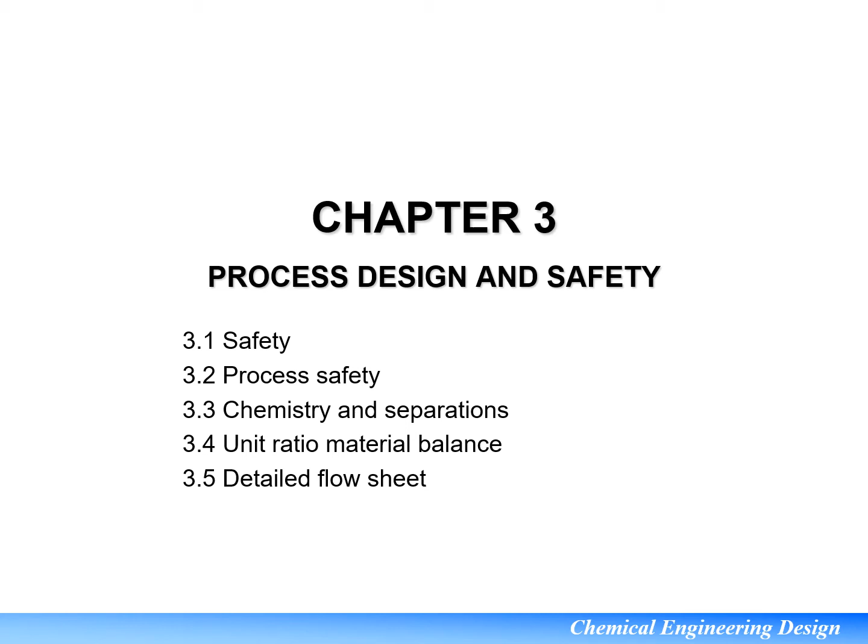All these subchapters you have already learned, in subjects during semester 1 if I'm not mistaken, and also in subjects during semester 3 for material balance and separation in semester 4. So I will just briefly explain this topic and relate it to what we're going to learn and what you're going to do for your assignment.

Safety is a safe design and operation of facilities, of importance to every company. It's involved in the manufacture, not limited to fuel, chemicals, and pharmaceuticals. All companies, all industries need this safety, because when we prioritize safety, we ensure that our workers are safe to work inside our company, and also the surrounding residents and consumers, we can ensure that their life is not affected or harmed by our company's operation.

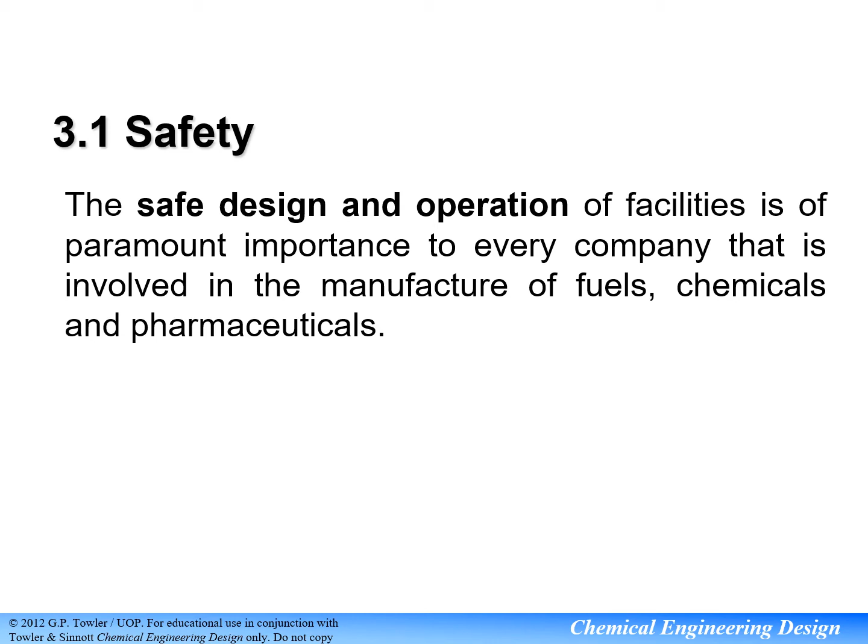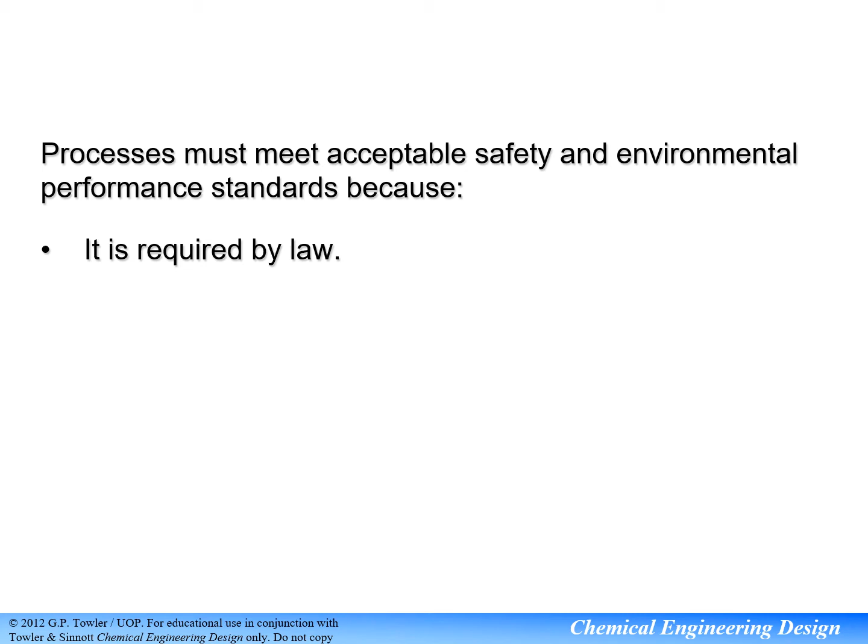The process must be acceptable for safety and environmental reasons, because safety is required by law. As we all know, we have DOSH, NIOSH, DOE. So all these agencies are the bodies for safety.

The other reason is the cost - human, social, economic - of non-compliance can be catastrophic. Sometimes incidents happen in industry involving explosions. This explosion basically doesn't only affect a person's life, but the cost of the equipment operation is also affected. So when there is an explosion, the equipment could be damaged 100%. The company then has to bear that cost to do a restructure and maintenance on the equipment.

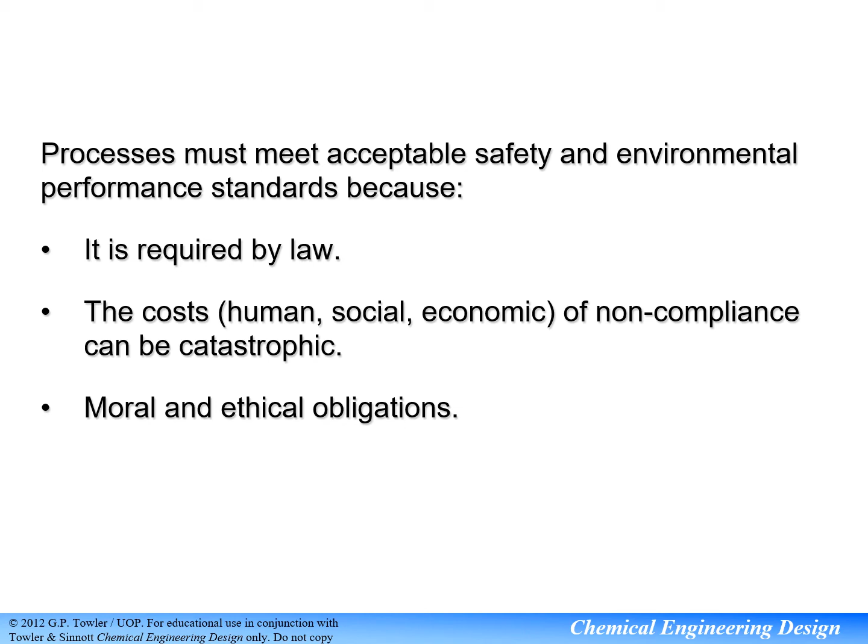The other reason is moral and ethical obligations. The most major chemical plant safety legislation is Akta Keselamatan dan Kesihatan Pekerja, which is DOSH. We also have the FMA, which is Akta Kilang dan Jentera, called the Factory and Machinery Act. We also have the Akta Petroleum.

It depends on the company. If your company deals with petrochemicals or petroleum, yes, you need to consider the Petroleum Act. And if that company produces a different product from petroleum, that company also has a different act to comply with in order to make sure their operation is safe. So it depends on the company itself. But for all companies in Malaysia, the DOSH Act - Akta Keselamatan dan Kesihatan Pekerja - all companies must follow, and also the Akta Kilang dan Jentera.

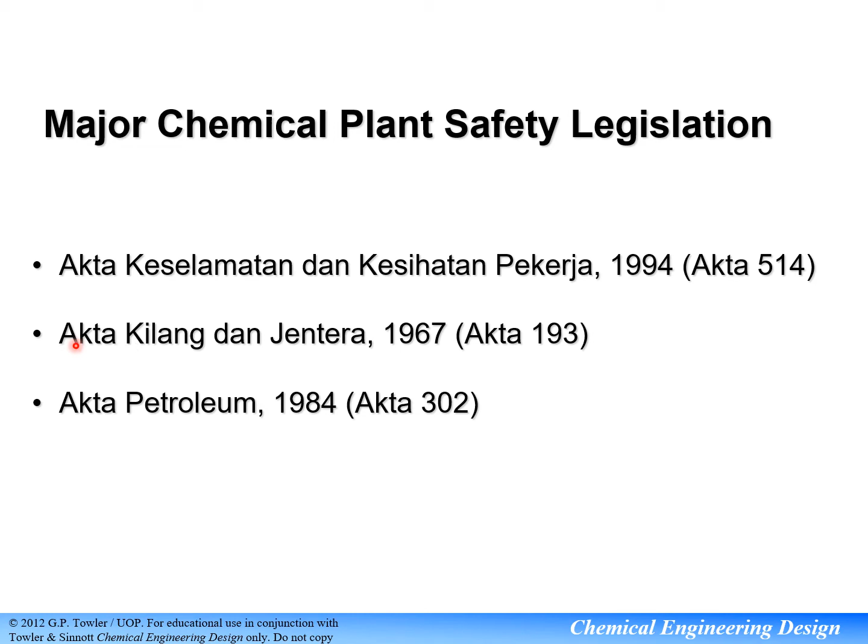Chemical plant hazards. Basically, what you're going to do is design a safe process or product. We need to understand and mitigate the associated hazards. An example of hazard is material hazard, which could be toxicity, flammability, or incompatibility. The other hazard is process hazard, which includes overpressure, explosion, loss of containment, and noise.

This you already learned inside Plant Safety and Occupational Health, right? During your semester 1, if I'm not mistaken. So toxicity also you already learned.

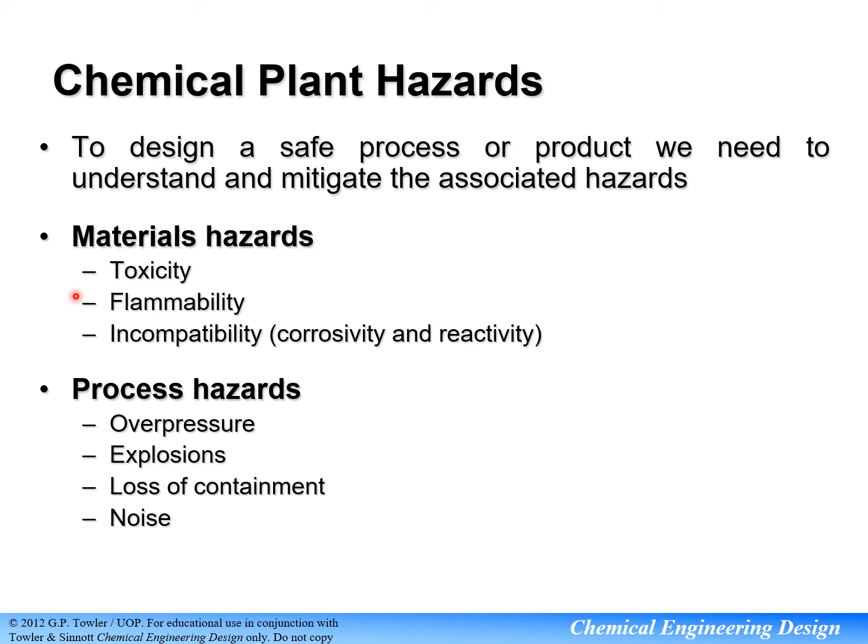Let's look at the hazards one by one. Now we move to toxicity. For your information, almost every chemical is toxic in a certain amount. We have an allowable amount for you to use a certain chemical. When you reach a higher limit amount, it could be toxic to your health, to the surrounding area, and also to the ecosystem nearby your company.

For your information, chemical plants tend to have a large enough amount of chemical to cause serious concern for workers and local residents. Normally in a chemical plant, they will use a raw material or chemical, for example raw material or product, in a big amount like 1,000 tons.

Can be per day or per week. So in order to do a process design, you need to consider first the elimination or substitution of the most hazardous compound, and second you need to do prevention of releases. If you find that you will release a harmful chemical from your company, you need to come up with a prevention measure. To be safe, it's better to eliminate the hazardous compound or material that you use inside your operations first.

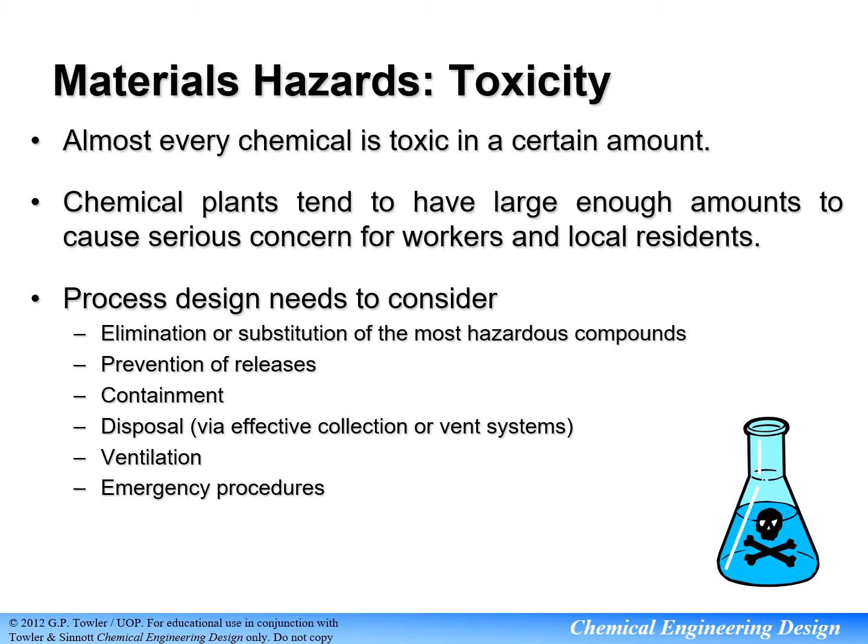Okay, so now I will move. For the acute effect, normally that's the result of short-term exposure. For the chronic effect, the symptoms develop over a long period of time, such as cancer. So basically, this is the result of long-term exposure.

The other thing you need to consider inside toxicity is lethal dose. You already learned this inside process safety, there is a calculation to calculate the lethal dose. So basically, lethal dose is the dose at which 50% of test animals are killed.

The other thing for toxicity is threshold limit value, TLV, or permissible exposure limit, PEL. You can calculate TLV and PEL based on the formula you learned inside the process safety subject before. Basically, the concentration believed the average worker can safely be exposed to is around 40 hours per week.

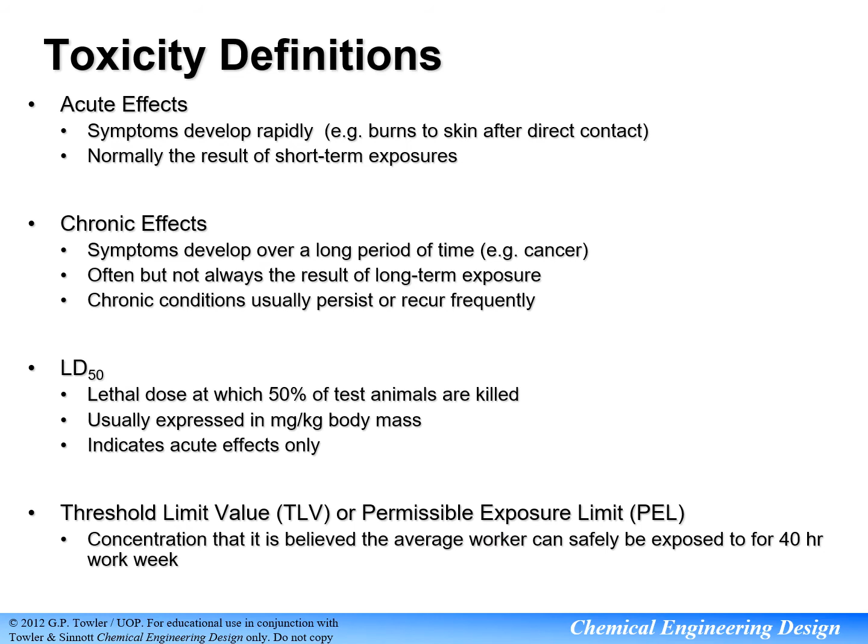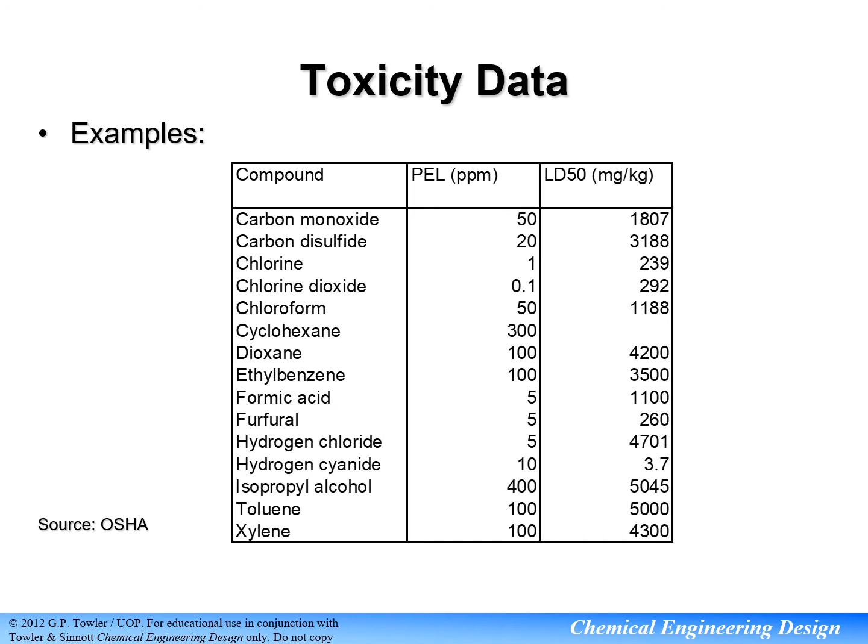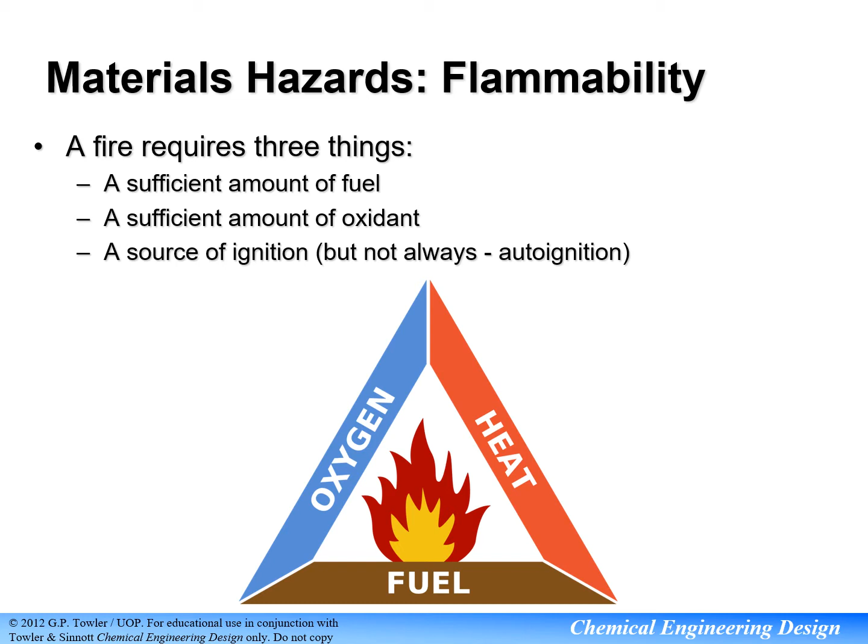Possible ignition sources include electrical equipment such as motors and actuators. Usually this equipment is specified as flame proof or non-sparking when fuel is present.

Next possible ignition source is open flame from furnaces, incinerators and flare stacks. Next is static electricity.

This static electricity can be from any flow, such as pipes, vessels, or flanges. So if you notice inside the chemical plant, normally these pipes, vessels, and flanges are always grounded.

Lastly is miscellaneous sources like matches, lighters, and mobile phones. Basically, inside the chemical plant, all these three cannot be used.

So if you're working inside a plant, in order for you to contact outside people, you can go to the control room. Inside the control room there is a telephone provided for the workers to contact outside people.

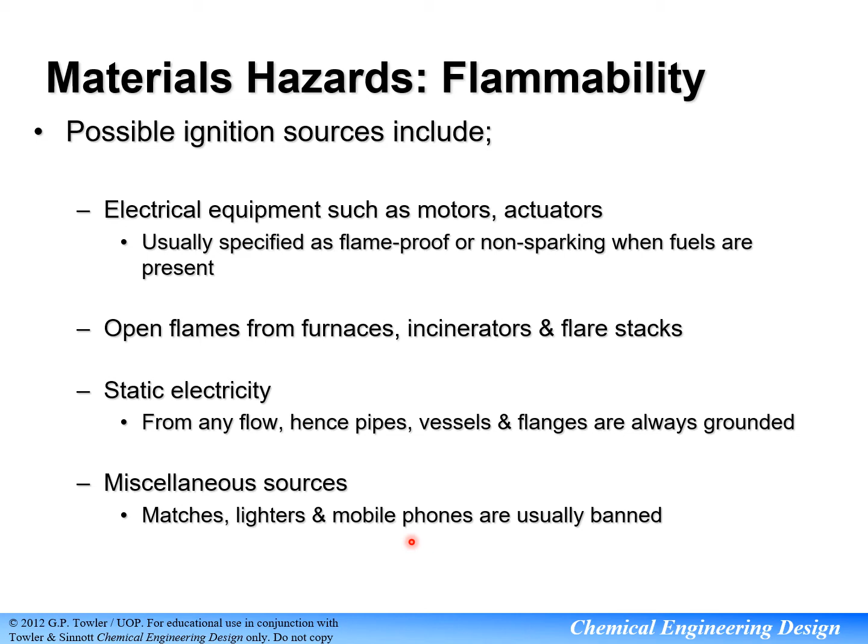So the flammability definitions: we have flash point, auto ignition temperature, and also flammability limits. Flash point, in simple words, is the lowest temperature at which the material will ignite from an open flame. The auto ignition temperature is the temperature at which the substance ignites in air spontaneously.

So we have the flammability limits, which have a highest and lowest limit - the highest and lowest concentration in air at normal temperature and pressure at which the flame will propagate through the mixture. This depends on the substance or material, the flammability limit. You can find all this information inside the MSDS.

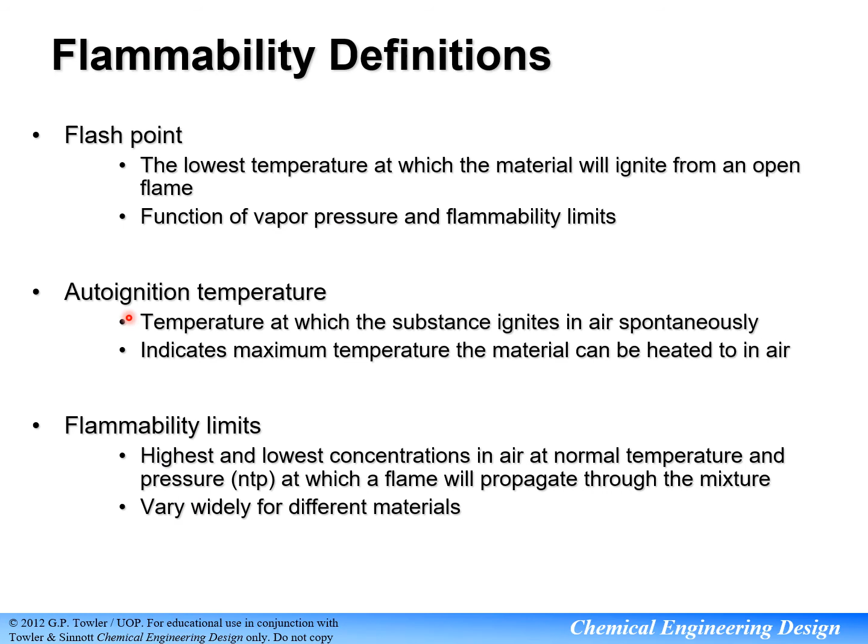Okay, now we move to flame suppression. For flame suppression, normally in the design of chemical equipment or piping, we need to install the flame arrestor. This flame arrestor is used to prevent a flame from propagating back from the vent. It is installed on the vent line of equipment that contains flammable materials.

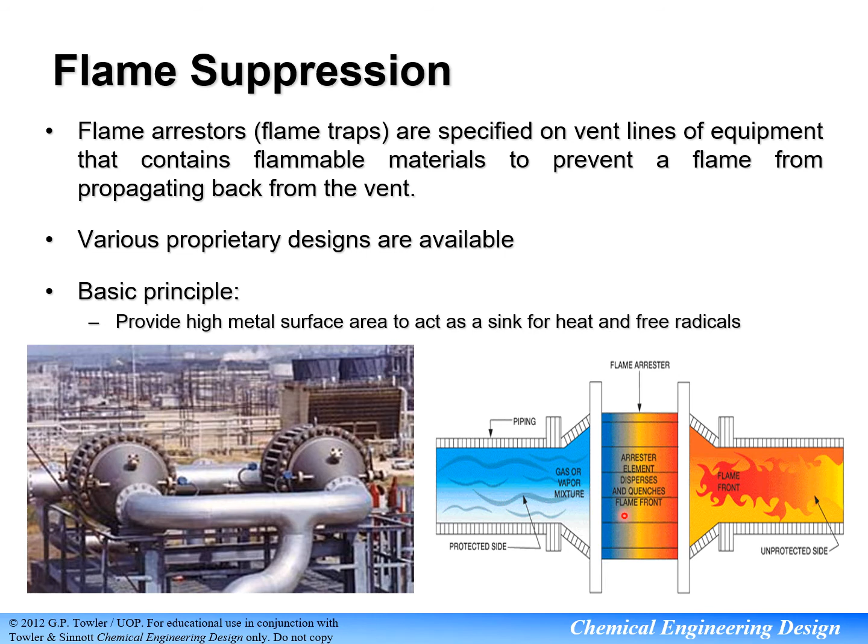Okay, next is incompatibility. For example, if your company produces many types of products - like what I experienced before, I was working inside a painting and coating company. We have so many grades of painting and coating, for example, alkyd, unsaturated polyester, and also acrylic.

These three products are different types of products. To produce these three products, we have to use different reactors, different adjustment tanks, and all the process units are different, because alkyd is an oil-based product, meanwhile acrylic is a water-based product.

For example, let's take one like unsaturated polyester - inside unsaturated polyester we have so many grades, and all these grades use different types of raw materials. So we need to study first the compatibility of the raw materials, so that we don't use the wrong raw material in the wrong equipment. That's what is meant by incompatibility.

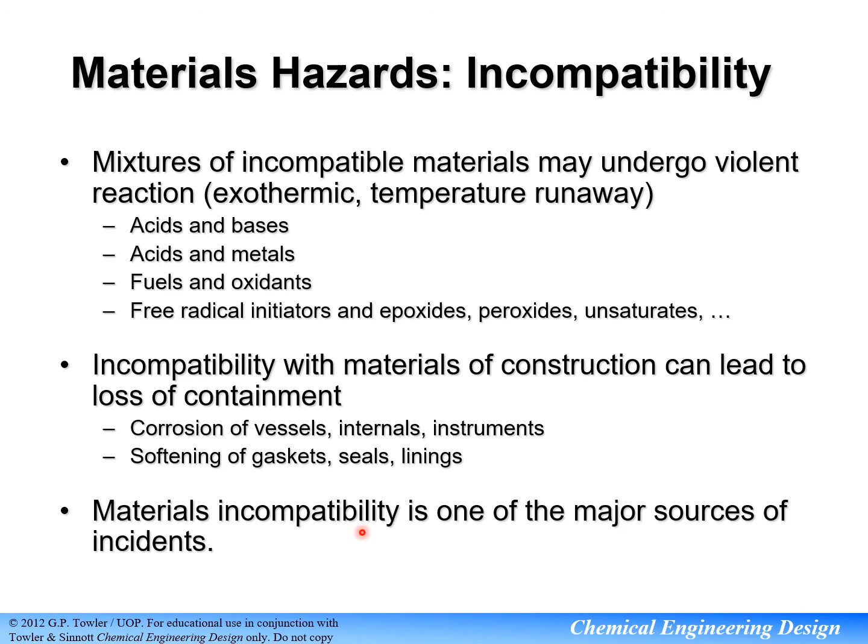So this incompatibility can lead to loss of containment. It can cause corrosion of vessel internals or instruments, and also it can soften the gaskets, seals and lining. So if the gasket, seal and lining is softened, it can cause leaking, explosions, or overpressure of the fluid inside the piping. So basically this incompatibility is one of the major sources of incidents.

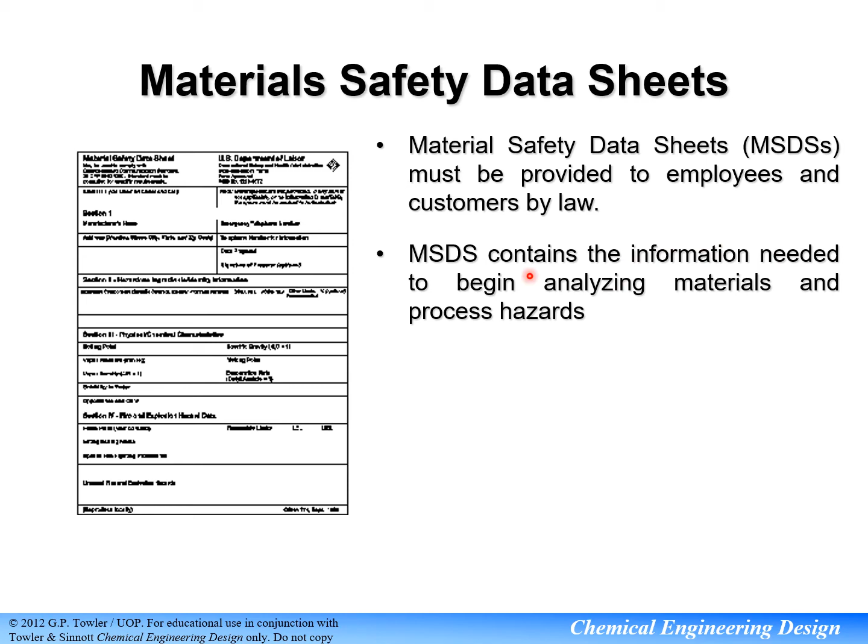Okay, so this is the material safety data sheet. You also already learned about this inside the process safety subject. So the function of this MSDS is to contain the information needed to begin analyzing material and process hazards.

Okay, the role of MSDS in process design. I think you are already familiar with this role of MSDS, so I'll just briefly explain. The MSDS is used to improve the intrinsic safety of the process. It can be used to eliminate incompatible mixtures, and substitute less hazardous chemicals when possible, for example, using toluene instead of benzene as a solvent. All this information we can get from the MSDS.

Lastly, MSDS is used to ensure that the design meets regulatory requirements, such as vapor recovery and other emissions.

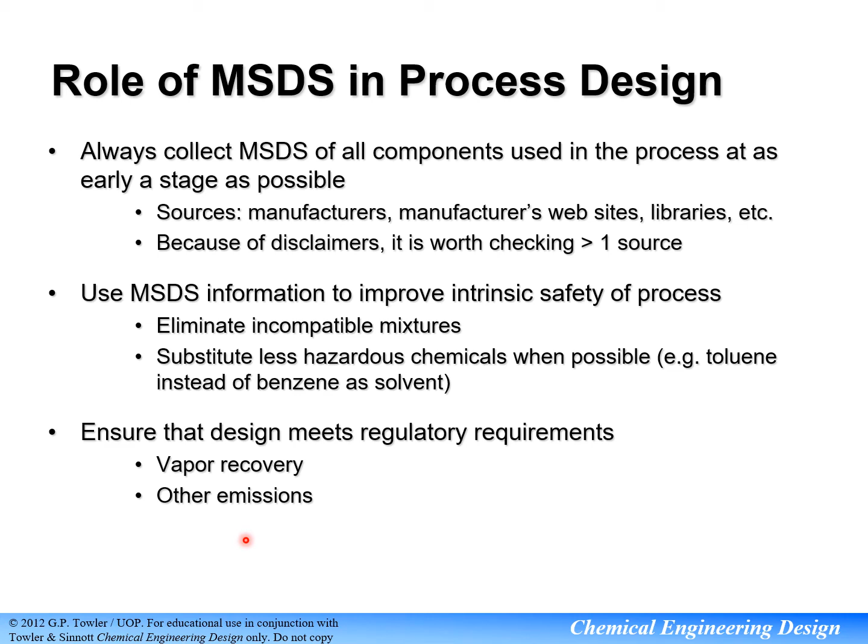Design for material hazard, as we saw in the previous slide. For material hazard, we need to consider substitutions, containment, prevention of releases, ventilation, disposal, and provision of emergency equipment. For substitution, use less toxic or hazardous materials. For containment, you need a sound design of plant and equipment, for example, using welded joints instead of flanges.

Next, for prevention of releases, you need to design equipment and disposal systems. This equipment can treat the releases first. So if the releases reach levels higher than the allowable limits, they can be treated using the equipment you have designed.

For ventilation, normally we use open plant structure or engineered ventilation systems. For disposal, you need to use effective vent stacks and scrubbers. The scrubbers video I already posted inside the Padlet, so you can watch it to get the idea about scrubbers. For disposal, you also need collection and treatment of runoff water and liquid from relief systems.

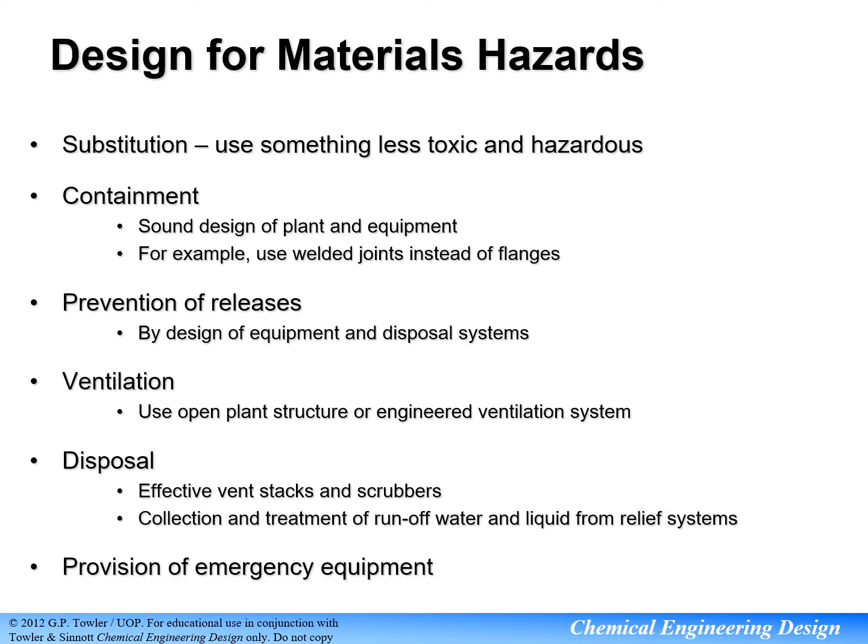Okay, now we move to process hazard. The example of process hazard is overpressure. Overpressure occurs when mass, moles, or energy accumulate in a contained volume. When it accumulates at high concentration, high mass, or high energy, it can cause overpressure. So the rate of accumulation determines the pressure rise.

Process controls may not be able to respond quickly enough. So if the pressure is not relieved by a pressure safety valve, the outcome could include vessel rupture, explosion, and other loss of containment. Basically, if you notice inside our control lab or our equipment, normally we have a pressure safety valve on top of it or at the bottom of it. This pressure safety valve is used to relieve the accumulation of material inside the tank or vessel, to avoid overpressure.

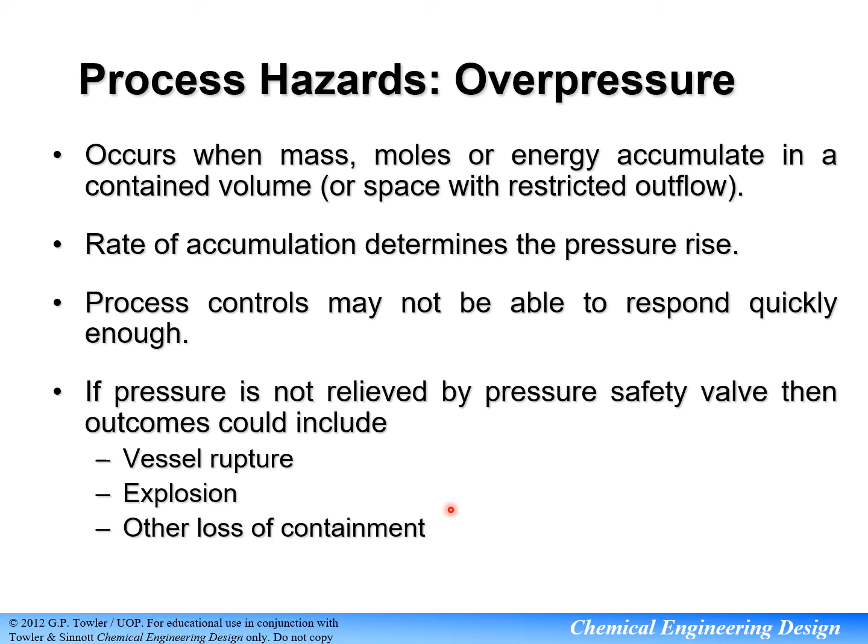Next is fire and explosions. A fire requires a flammable mixture and also an ignition source to cause these explosions. Fire in a chemical plant can quickly lead to damage to control systems and equipment, and it can also cause overpressure, loss of containment, and explosions.

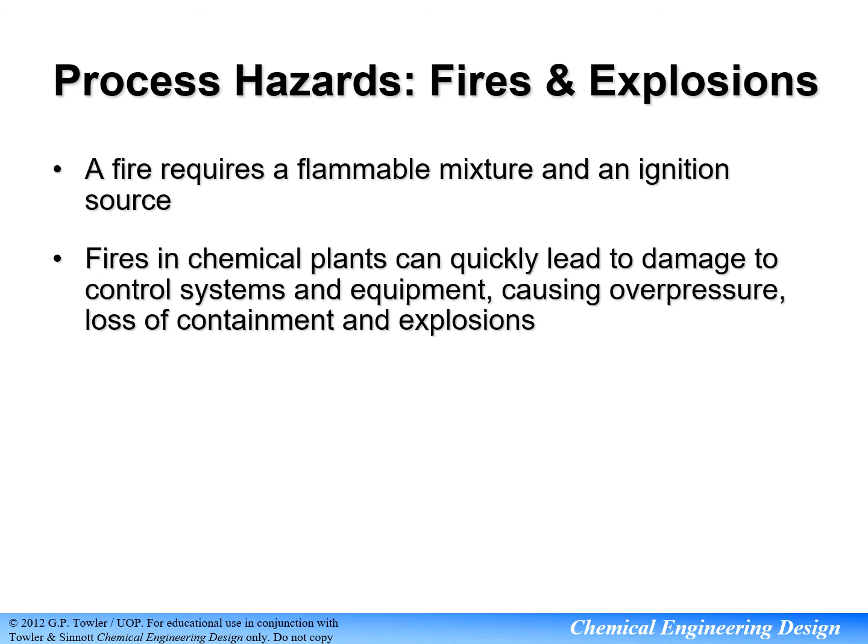Can you think of possible sources of ignition on a chemical plant? The possible sources of ignition can be overpressure, leakage, or short circuit, and there are so many sources of ignition actually. This we can identify by doing a risk evaluation.

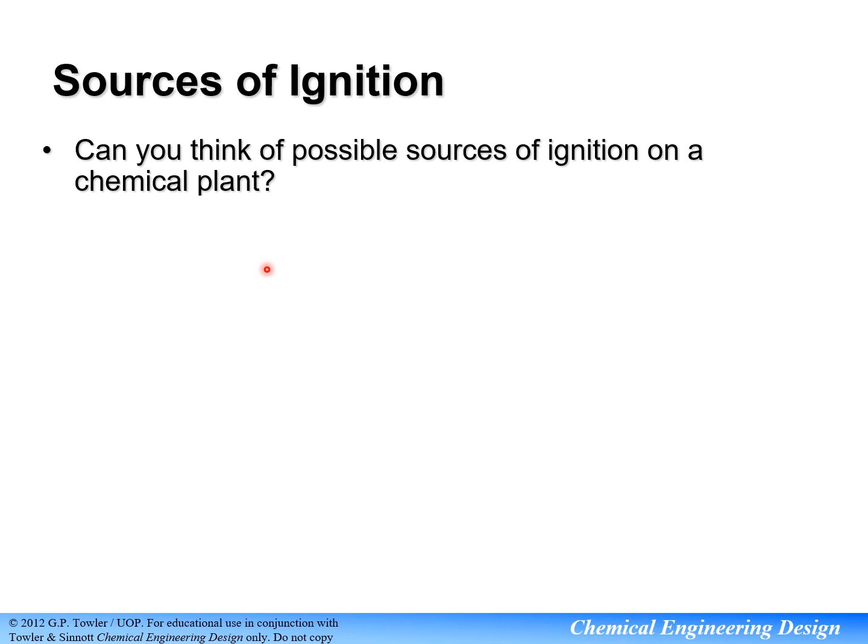So this is the type of sources of ignition: sparking of electric equipment, process flame, static electricity, lightning, vehicles, portable electrical devices, welding and cutting equipment, and miscellaneous sources. Basically, these miscellaneous sources are already banned inside the plant.

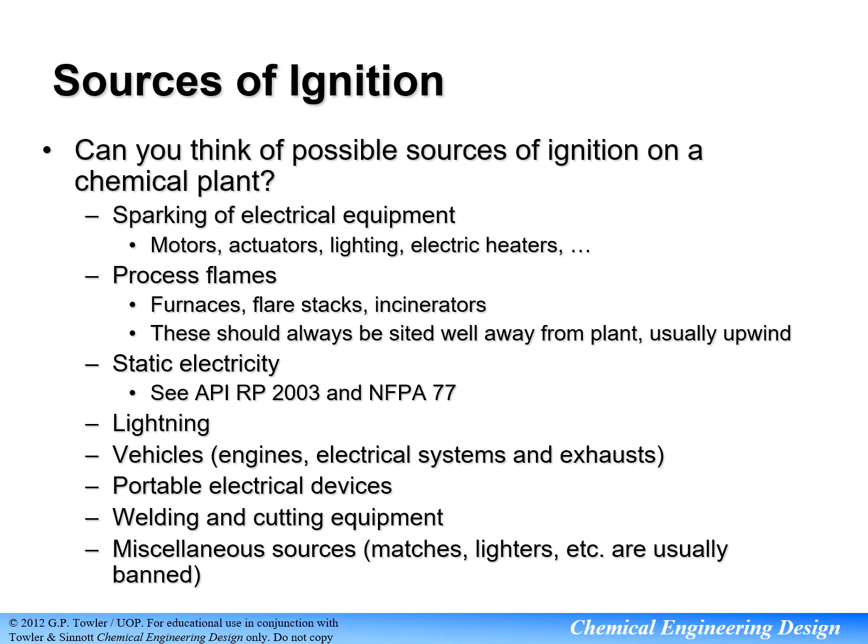For the electrical system, like what you learned inside process safety, the normal practice is to put the lockout tag out, to prevent electric shock accidents. So when someone does maintenance on the equipment, that person needs to follow this procedure in order to notify the other workers that the equipment is under maintenance.

If not, the other workers will operate the equipment. If they operate it, the people working at the maintenance site will get injured, or in the worst case, it can cause death or explosions.

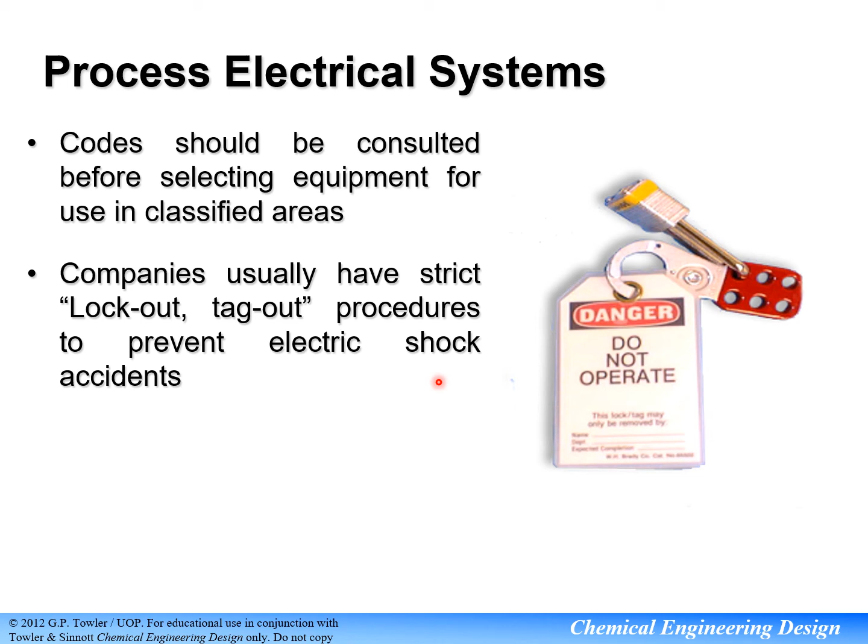Next is explosions. An explosion is the sudden catastrophic release of energy causing a pressure wave. It can be caused by ignition of a flammable mixture like liquid, vapor, or solids, or by release of thermal energy like boiler rupture or boiling liquid expanding vapor explosions.

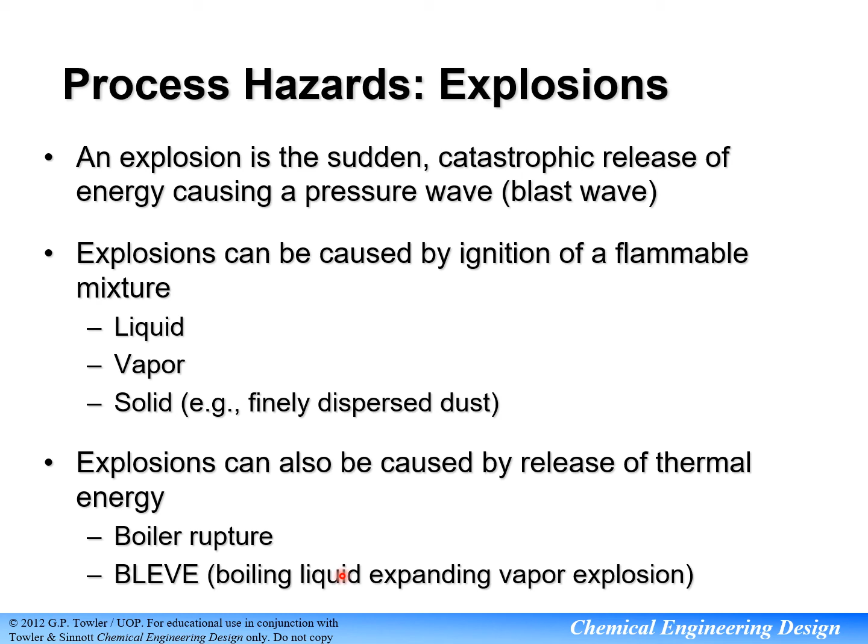For the definitions of explosion, we have four terms: deflagrations, detonations, expansion factor, and flame speed.

For deflagrations, the combustion zone normally propagates at a flame speed usually less than 30 meters per second, and the pressure wave generated is usually less than 10 bar. The principal heating mechanism is combustion.

For detonations, the combustion zone propagates at supersonic velocity, around 2000 to 3000 meters per second. This is a bigger explosion compared to deflagrations. The principal heating mechanism is shock compression, and it usually requires confinement or a high intensity source. A deflagration can turn into a detonation when propagating along a pipe.

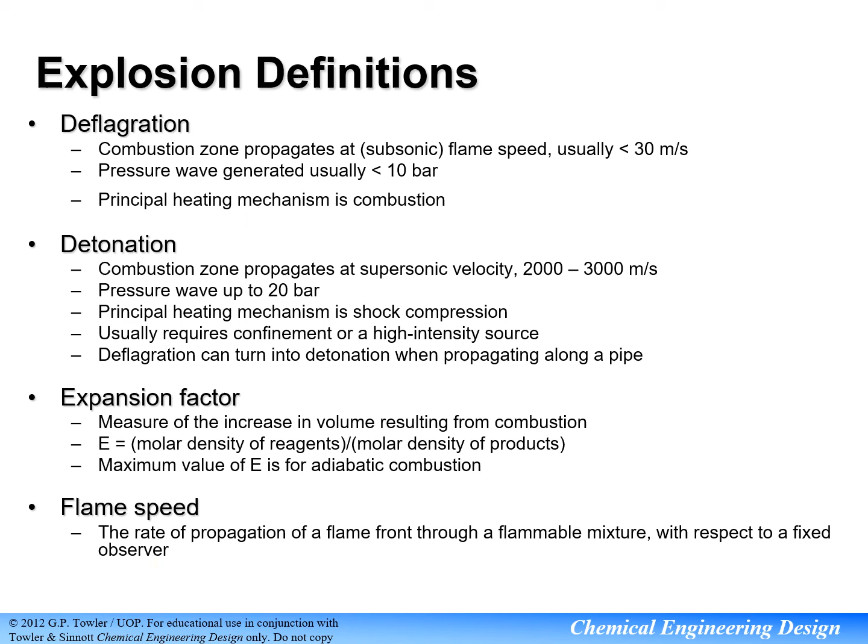For explosions, there are design implications. We need to design to prevent explosions from happening. The equipment design must consider this - we need to design equipment to prevent the formation of explosive mixtures whenever possible. Basically, it is advisable to operate outside the flammability envelope.

Next, we need to consider the confined explosion as a pressure relief scenario and ensure that the PRV is sized to allow adequate relief load to prevent detonation. This PRV sizing is according to the equipment size - if your equipment is bigger, you need to design a bigger PRV to allow adequate relief of load.

The other design implication is to use a flame arrestor. This flame arrestor prevents deflagration from propagating into detonation.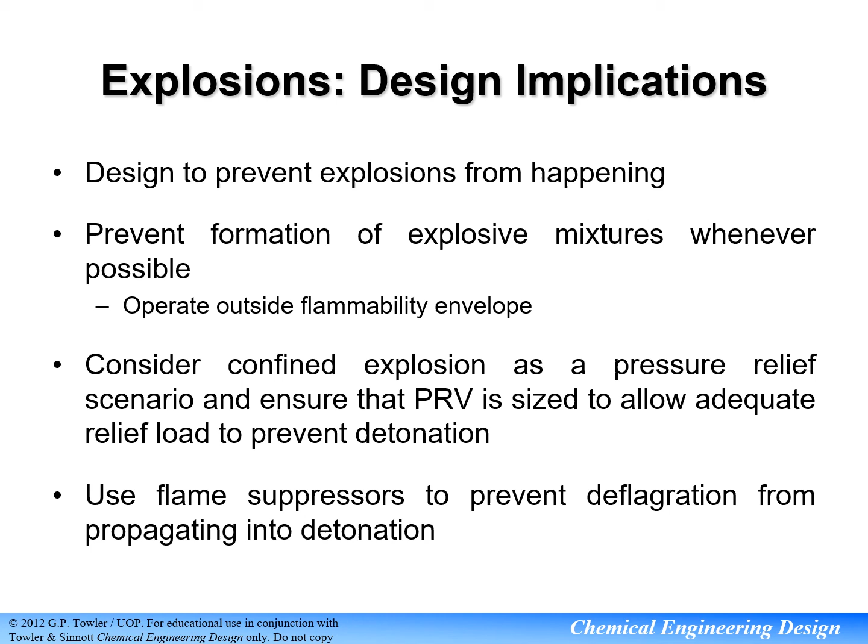Now we move to loss of containment. The primary means of protecting the public from toxic chemicals is containment by the plant itself - we have to contain the toxic chemicals inside our plant area only.

So how can loss of containment occur? It can occur due to pressure relief, operator error - for example leaving a sample point open, poor maintenance procedure like failure to drain and purge properly. If we don't consider the drain system or design a proper drain and purge system, it can cause a failure. Lastly, it can be caused by failure to put everything back together properly.

Next is leak from degraded equipment, which can be caused by corrosion. For equipment that needs to handle corrosive chemicals, we have certain materials that we can use.

In order to design the equipment, we need to see the overall picture of the process itself - whether we need a special equipment with special material. We need to know the consequence first: if leakage happens, can the chemical cause corrosion, or can it damage the seal or gaskets? We need to consider all of this in order to prevent loss of containment.

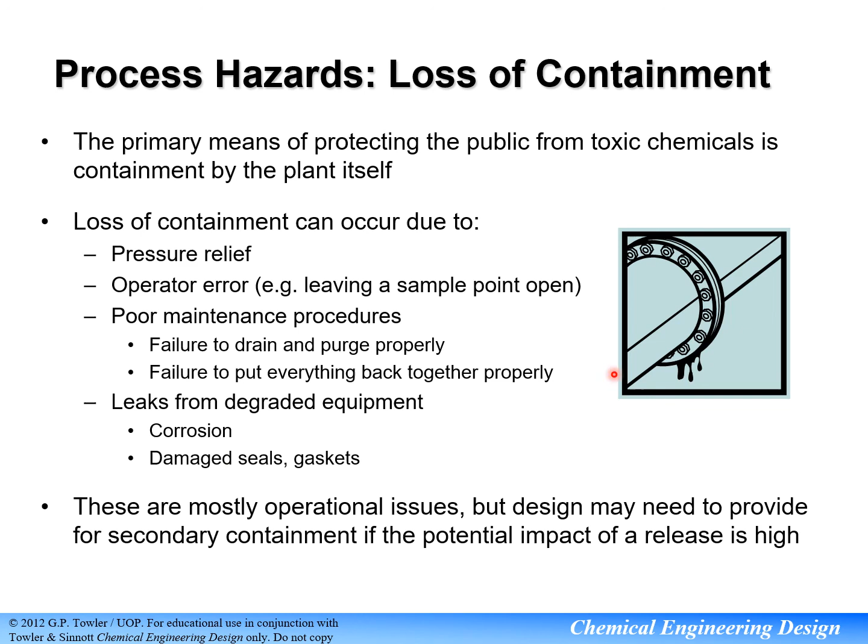The other process hazard is noise. As you all know, a chemical plant can be very noisy. This noise comes from compressors, turbines, motors, and solid handling equipment. Sometimes pumps can also produce noise.

If you're exposed to this equipment for a long time, it can cause chronic effects like permanent damage to hearing. So inside the plant, you need to wear ear protection like earbuds or ear muffs. Basically, our hearing system can bear noise less than 80 dB.

When the noise at the area is greater than 80 dB, you need to wear ear protection. Permanent damage can be caused by noise greater than 85 dB.

Basically, this subchapter is a theoretical overview of the safety considerations you need for your plant design. In the next subchapter, I will teach on the risk analysis that you need to perform in order to do a plant design. That's it for now. Thank you.